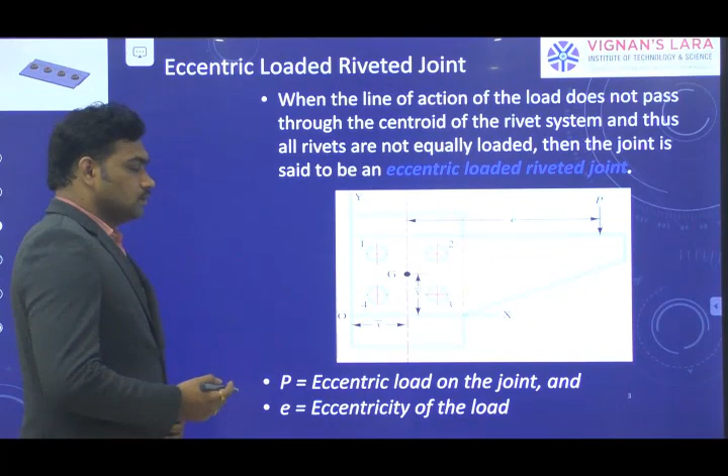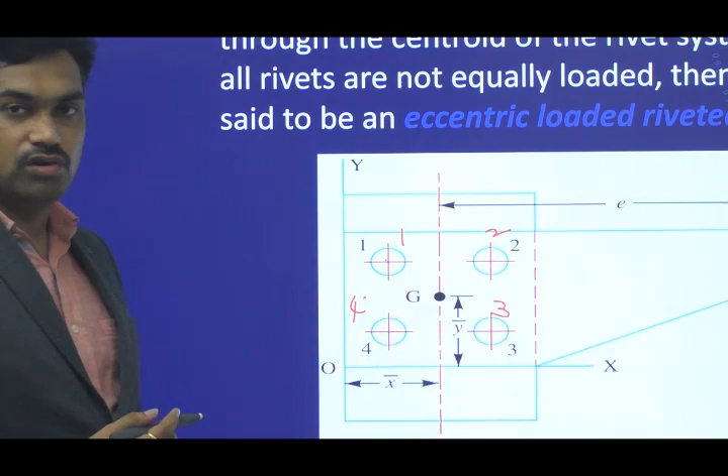So here it is an eccentrically loaded riveted joint. You can observe this is rivet 1, rivet 2, as well as 3 and 4. Here the load is acting on the joint, not directly with respect to the bolt rivets, but from the center of gravity of all the rivets. You can have the center of gravity at the center of the rivets, because of the symmetrical arrangement of the rivets. From the center of gravity to the load application point, that is load P, there is an offset distance given, that is e.

Due to this eccentric distance, the rivets may be subjected to twisting moment as well as shear of rivets. So how are these riveted joints going to be designed, in order to withstand the load P with the application of the eccentric load or distance with respect to the center of gravity?

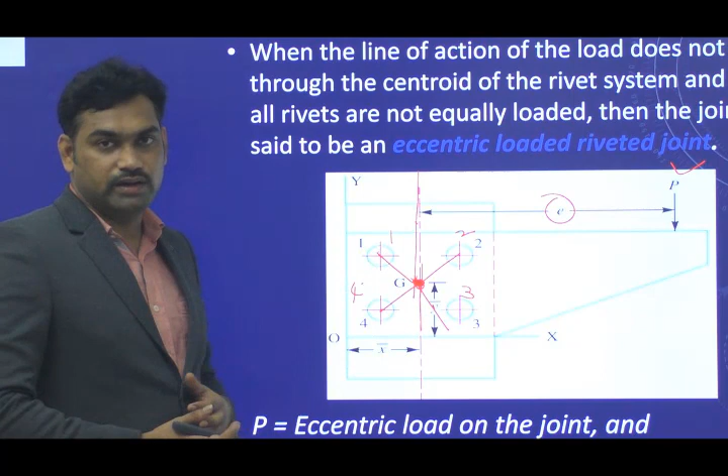The necessary size required to withstand the joint is found out in the design. So when the line of action of the load does not pass through the center of the rivets and the rivets are not equally loaded, then the joint is said to be an eccentrically loaded riveted joint.

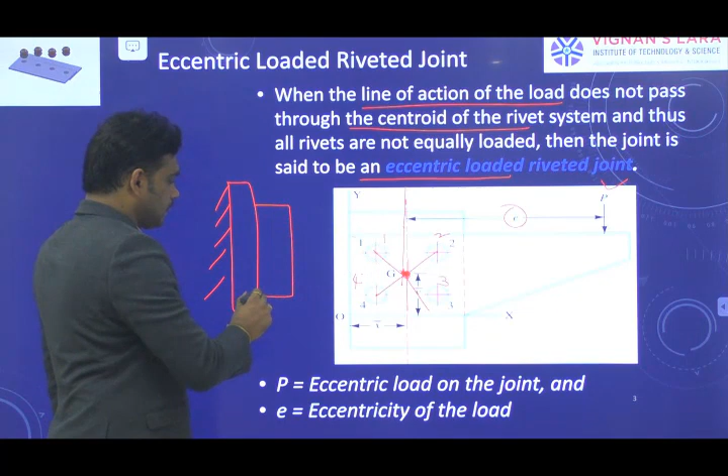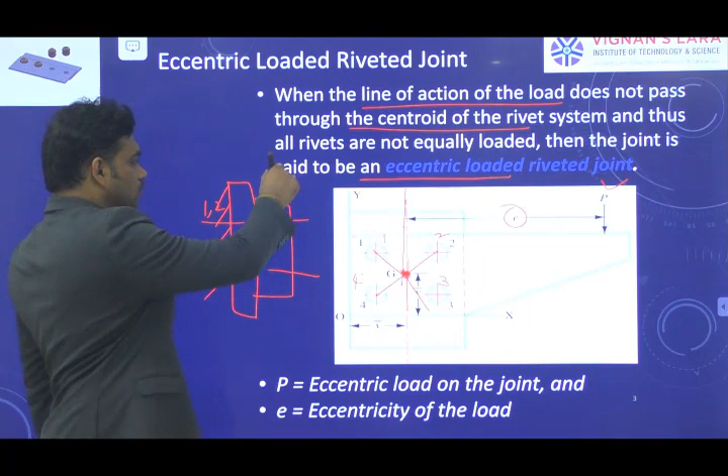So here I can observe, this is the fixed plate, and here this is the plate that is joined upon the rivets, which means rivet 1 and 2 will lie at the center, and rivet 3 and 4 will also lie at the center. By the application of the load here, the load is acting downward, in this direction, upon this plate.

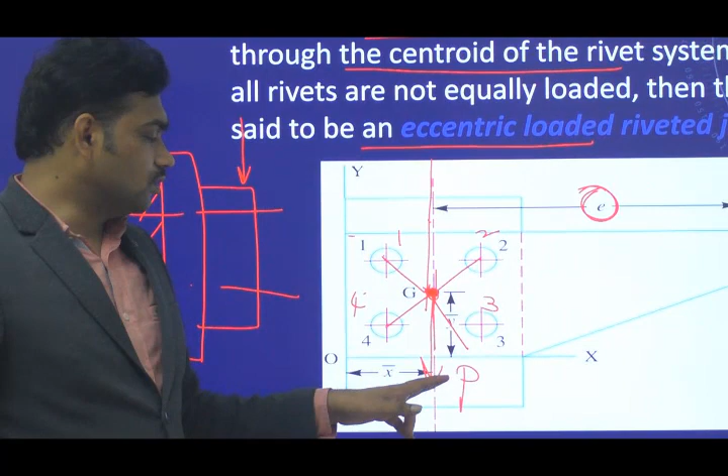Initially, we don't consider this eccentric load; we can consider the load to be acting at the center of gravity G, that is the center of gravity of all the rivets. The load will be acting through it. Whatever the magnitude of load acting at the end, the same magnitude is assumed to be acting or passing through the center of gravity.

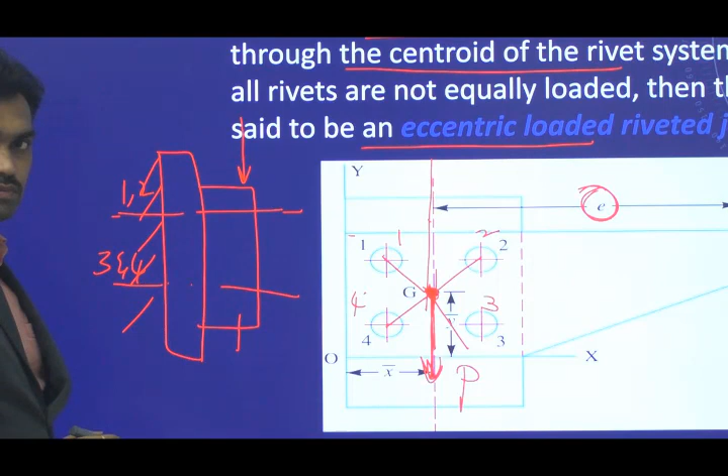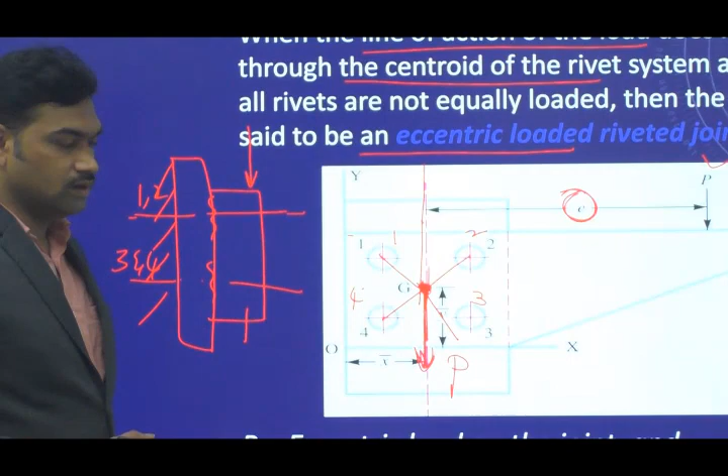Due to this load acting, the load is acting in this direction, perpendicular to the axis of rivet, which causes the shearing of rivets at this juncture of the fixed plate and the bracket. Due to this shearing, the shearing load will act.

Whatever total magnitude is acting at the center of gravity will be equally shared to all the number of rivets, so that the direct shear force, or direct shear resisting force, may act at all the number of rivets. That is what we call the primary shear force.

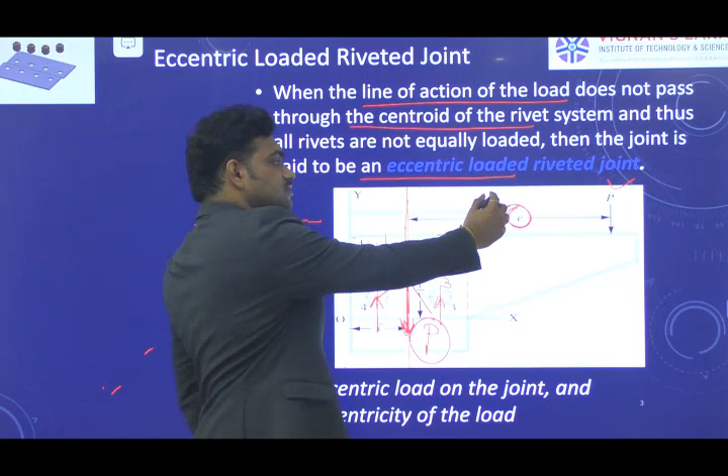Along with the primary shear force, now consider the second case. With an eccentric distance with respect to the center of gravity, due to load into its eccentric distance about the center of gravity, this will cause a turning moment. Due to this turning moment of load, that will induce or act as secondary shear forces.

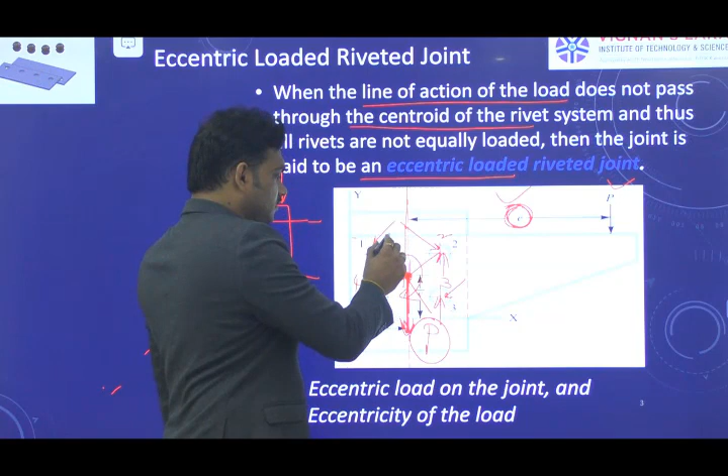So here we have two types of forces. One is when the imaginary load is acting through the center of gravity, which is subjected to direct shear, so that the total load can be equally shared to all the number of rivets — that is the primary shear force. Secondly, consider the eccentric distance E, which induces the twisting moment about the center of gravity, given by P into E, and that imposes the secondary shear forces, so that each rivet is also subjected to twisting.

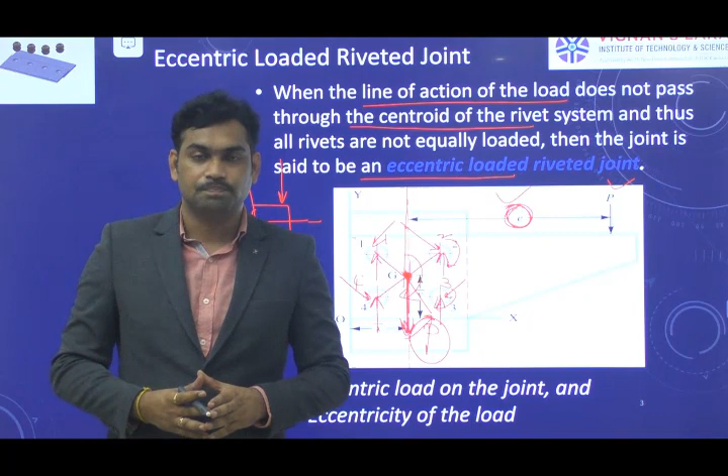So due to this secondary shear force, the secondary shear force is acting on the rivets here. So we need to see how the primary shear forces are found out, and how the secondary shear forces are found out, and finally how the resultant shear forces are calculated, so that it can be equated to the shear strength of all the rivets to find the diameter of the rivets required to withstand the eccentric load acting on the joint.

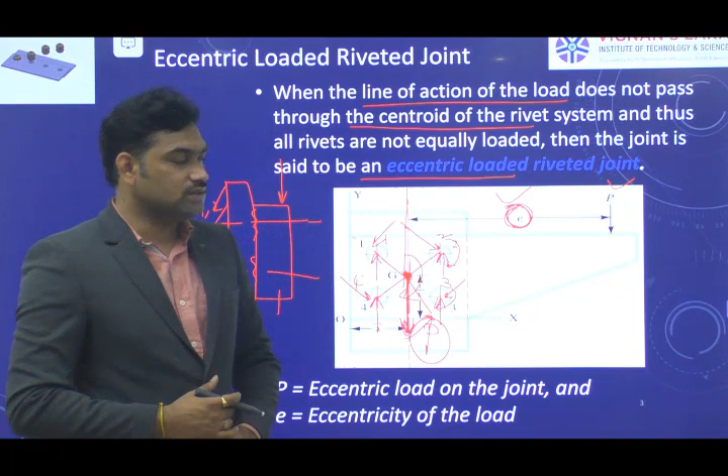Clear? So firstly we go with the primary shear forces. Before that, how to calculate the center of gravity, which you already know from earlier courses. The center of gravity is given by x dash and y dash with respect to all the rivets. There is A1, A2, A3 and so on. If you have the number of rivets, the cross section areas of rivets, and distances from the origin x1, x2, x3, x4 likewise by area.

Here we assume all the rivets are identical, so the cross section areas are the same. So I take n into A, so the total cross section area gets cancelled. So x dash is calculated by x1 plus x2 plus x3 and so on, divided by number of rivets denoted by n. Similarly y dash is calculated as y1 plus y2 plus y3 and so on, divided by n. By means of x dash and y dash you get the center of gravity of the group of rivets. Not a single rivet - for each rivet the center of gravity lies at its center, but for a group of rivets we need to find their proper center of gravity by knowing this x bar and y bar. That is the basic thing.

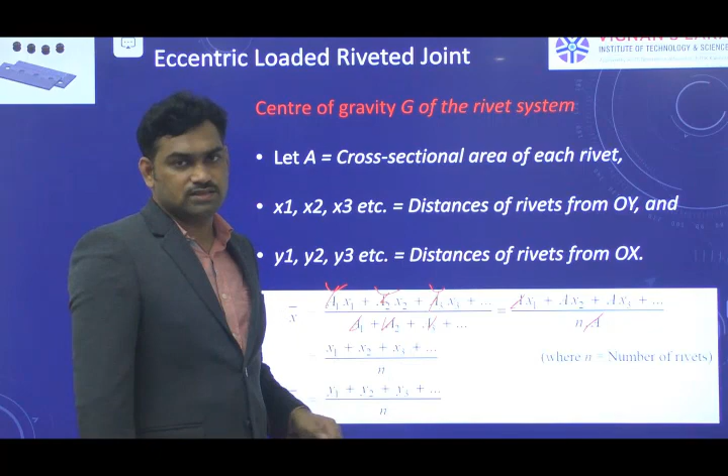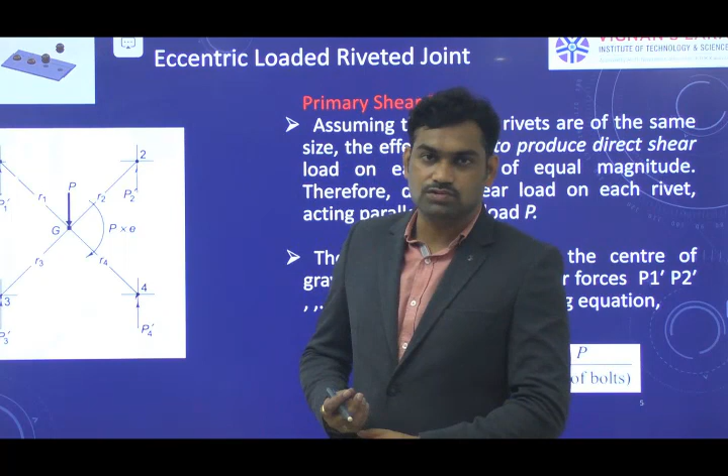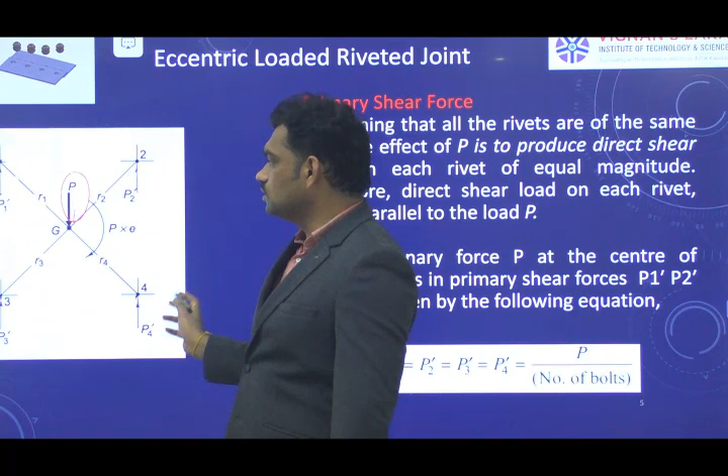After that you can find the primary shear force. Here the primary shear force occurs when the load is acting - an imaginary force equal to the magnitude of the load P acts at the center of gravity. You can observe in the diagram clearly, the load is acting downwards, so there are always resisting forces that act at each rivet. This total load can be equally shared by all the number of rivets - 1, 2, 3 and 4. All 4 rivets equally share it.

So the primary shear force acting at each rivet - the primary forces can be denoted by P dash, or P1 dash, P2 dash and P3 dash and so on - is given by total load, denoted by P, by number of rivets in the joint. That can always act upwards - the load acts downwards and the resisting forces act upwards, opposite to the load acting.

In the first case, assume the load acts along the center of gravity, so the resisting force acts upwards at all the rivets, and the total load is equally shared by all the rivets, given by total load divided by number of rivets. Here we assume the rivets are the same size. The effect of load P is to produce the shear stress, the direct shear load on each rivet, of equal magnitude. So the total direct shear load is equally shared by all the rivets.

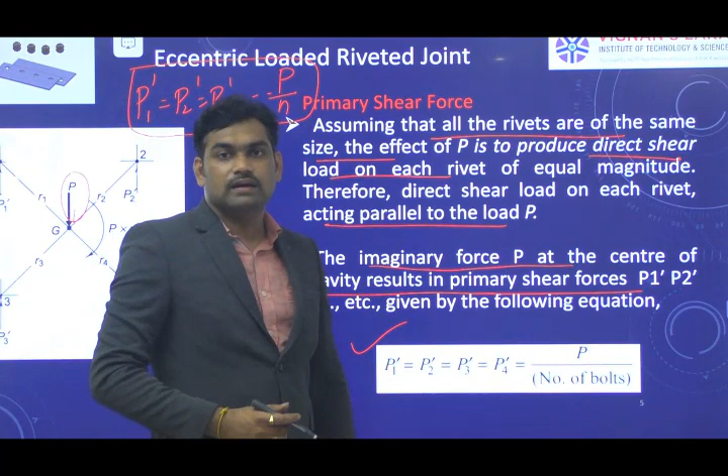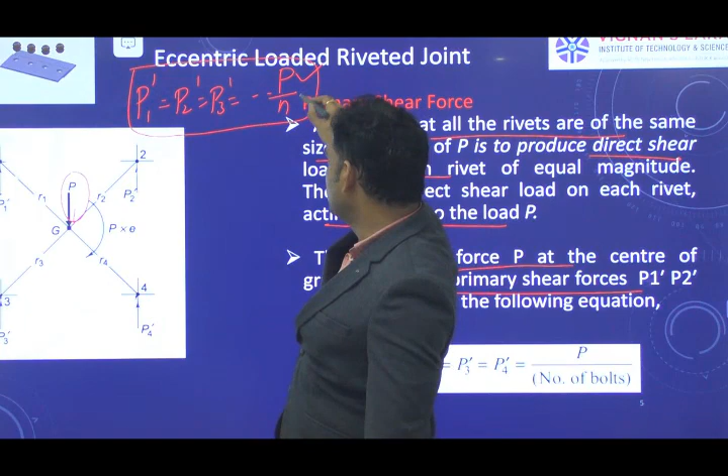The imaginary load P at the center of gravity results in primary shear forces P1 dash, P2 dash, P3 dash and P4 dash, given by the equation: P1 dash equals P2 dash equals P3 dash equals P4 dash equals total load divided by number of rivets. That is the primary shear force which acts upwards, opposite to the direction of the load acting at the center of gravity. Clear? So that is total load by number of rivets in a joint.

And next, the secondary shear force. You can observe that a moment is created due to the eccentric distance E, so the moment is given by P into E, about the center. The secondary shear forces are represented by P1 double dash, P2 double dash and P3 double dash, and act perpendicular to the radial distances from the center of gravity to the center of each rivet.

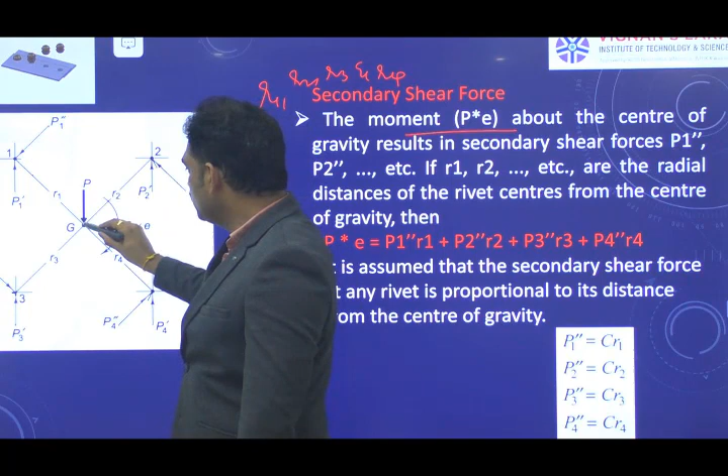The radial distances are denoted by R1, R2, R3 and R4 from the center of gravity to the rivet. So here you can write the center of gravity. This is the radial distance R1 for the center of rivet 1, R2 is the center of gravity to rivet 2, and R3 is the center of gravity to rivet 3. From the center of gravity to the center of rivet 4, you can denote it with R4.

The total moment acting in the joint, given by P into E, will be equal to the sum of all moments of all the rivets. So the moment at rivet 1 can be written as the secondary shear force acting at rivet 1 into their radial distance, that is P1 double dash into R1.

So that is about rivet 1. Similarly at rivet 2, P2 double dash into R2 gives the moment at rivet 2, and P3 double dash into R3, so moment at rivet 3, and P4 double dash into R4 gives the moment at rivet 4.

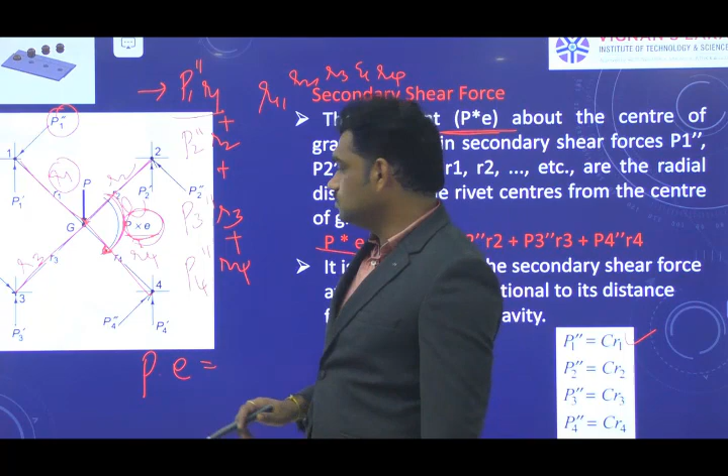So the total moment in the joint, denoted by P into E, can be equated to the sum of all moments of rivets, that is P1 double dash into R1, P2 double dash into R2, P3 double dash into R3, P4 double dash into R4. So the total moment is equal to the sum of all moments.

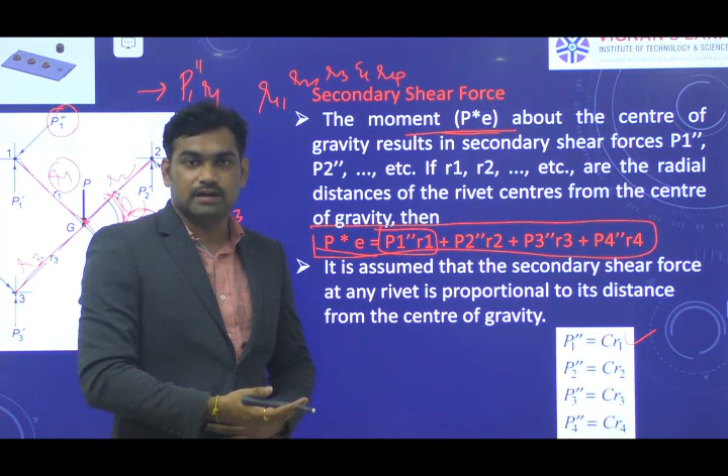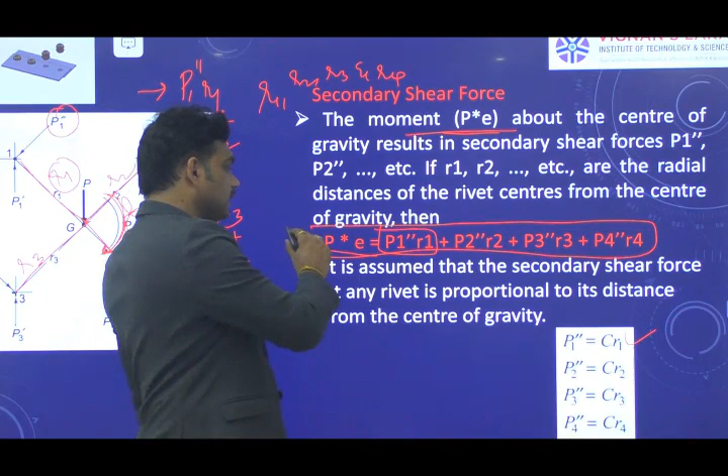Where P1 double dash, P2 double dash, P3 double dash, and P4 double dash are the secondary shear forces acting due to the total moment about the center of gravity, and R1, R2, R3, R4 are the radial distances from the center of gravity to the center of the rivets.

So the total moment P into E can be written as the sum of the moments at individual rivets: P1 double dash into R1, P2 double dash into R2, P3 double dash into R3, plus P4 double dash into R4. And there is one more assumption: these secondary shear forces acting at each rivet are directly proportional to the radial distances from the center of gravity to the center of rivets.

Which means P1 double dash is directly proportional to R1. If the radial distance is greater, the secondary shear force acting at that particular rivet is going to be greater. Similarly, P2 double dash is directly proportional to R2, P3 double dash proportional to R3, P4 double dash proportional to R4. So all the secondary shear forces are proportional to their radial distances.

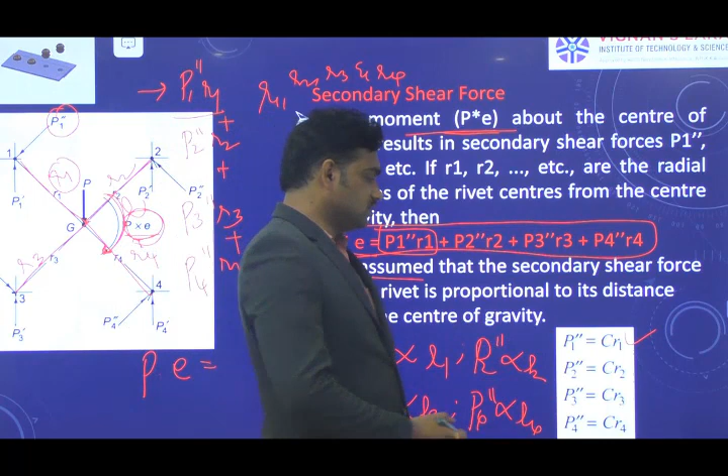To avoid this proportionality constant, I can place a constant C here. So P1 double dash can be written as C into R1, P2 double dash can be written as C into R2, P3 double dash equal to C into R3, P4 double dash equal to C into R4. This will be taken as equation 1, and this as equation 2.

From equations 1 and 2, P1 double dash can be written as C into R1, P2 double dash equal to C into R2, P3 double dash equal to C into R3, and likewise we get C into R4. So you can take a common factor of C here.

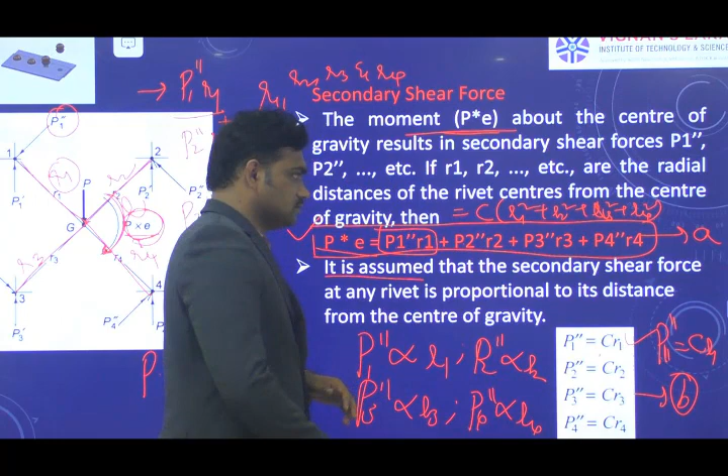So PE can be given as C into R1 square plus R2 square plus R3 square plus R4 square. From that you will get the value of C, calculated as C equal to PE divided by R1 square plus R2 square plus R3 square plus R4 square.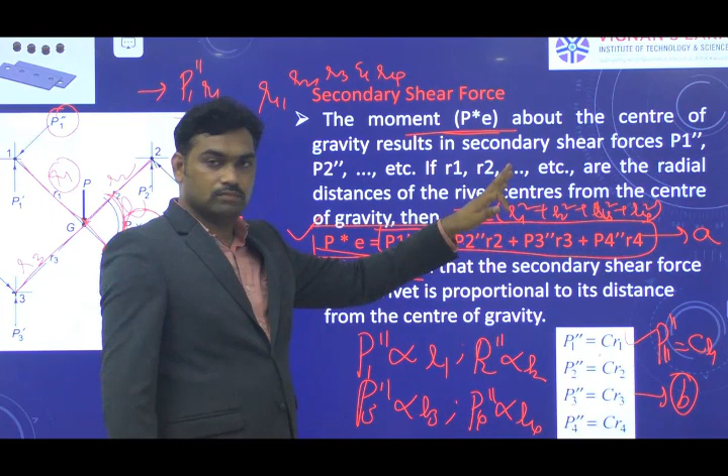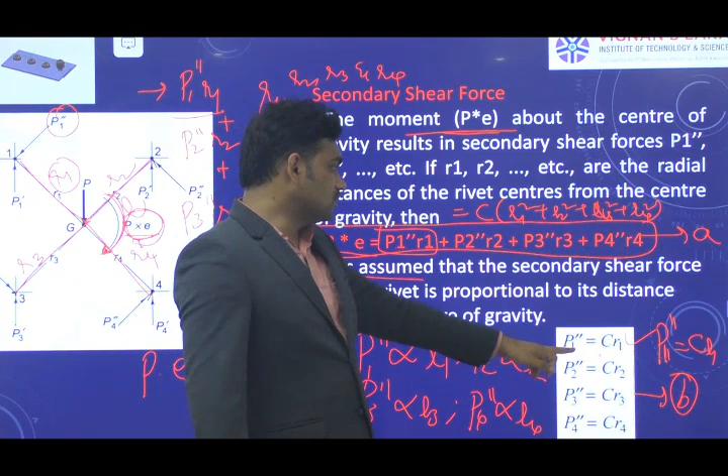Using that you can find the secondary shear forces acting at each rivet. So P1 double dash equal to C into R1, and you can substitute the value of C, which is PE by R1 square plus R2 square plus R3 square plus R4 square. So here we can substitute the value of C and get the secondary shear forces.

So secondary shear force can be given by P into E into R1 by R1 square plus R2 square, R3 square plus R4 square. Similarly P2 double dash, P3 double dash and P4 double dash, you can find out the secondary shear forces.

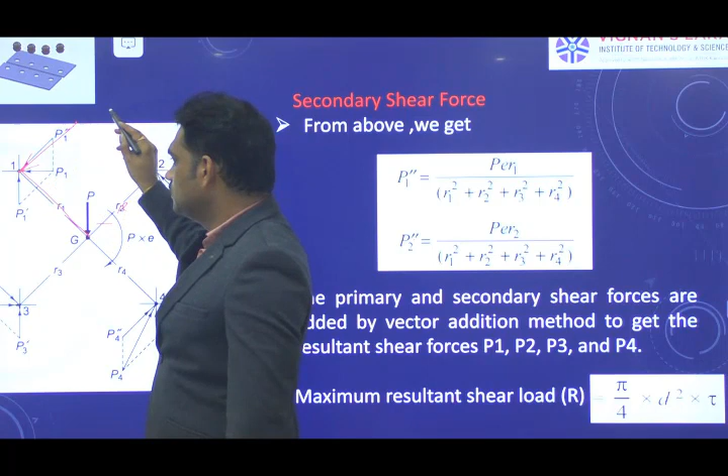But these secondary shear forces will always act perpendicular to the radial distances. You can observe, P1 double dash is acting, this is the radial distance, and this secondary shear force acts opposite to the moment. The moment is clockwise, so we have the anti-clockwise direction. We need to act the secondary shear forces perpendicular to the radial distance, that is P1 double dash and P2 double dash, this is the radial distance, and P2 double dash is perpendicular to that.

This is P2 double dash, and this is the radial distance of rivet 3, R3, and P3 double dash is perpendicular to that. Similarly, this is R4, so P4 double dash is perpendicular to that. So you can observe, all the secondary shear forces act in the anti-clockwise direction, because the moment is acting clockwise, we need to take opposite to that, anti-clockwise.

So you can observe, all the primary shear forces act upwards, and the secondary shear forces act perpendicular to the radial distances. Please remember that: primary shear forces act upwards, and secondary shear forces act perpendicular to their radial distances.

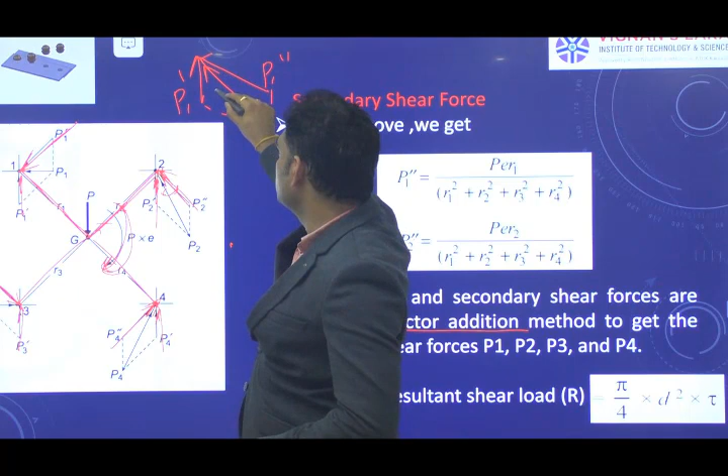After calculating the primary and secondary shear forces, we need to find the resultant shear force by means of vector addition. If we find the angle between the primary shear force and secondary shear force, primary acting upwards and secondary with some inclination, this is P1 dash and this is P1 double dash, we can find the resultant shear force, that is P1, the resultant shear force acting at rivet 1.

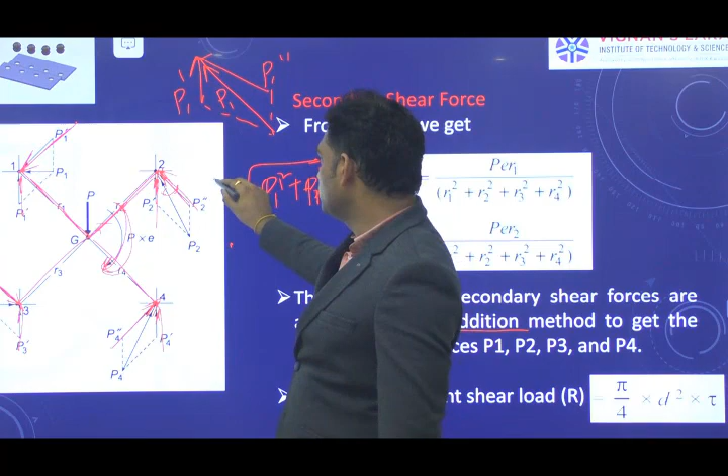Similarly, you can find all the resultant shear forces by means of root of P1 dash square plus P1 double dash square plus 2 P1 dash P1 double dash into cos theta, giving the resultant at rivet 1. Similarly, you can find all the resultants.

The maximum resultant value, that is the maximum resultant shear load, can be equated to the shear strength of the rivet, that is pi by 4 d square into tau, the shear strength of each rivet. Here I don't need to take n, because this resultant shear force is only for a single rivet - we are calculating separately the resultant forces at each rivet.

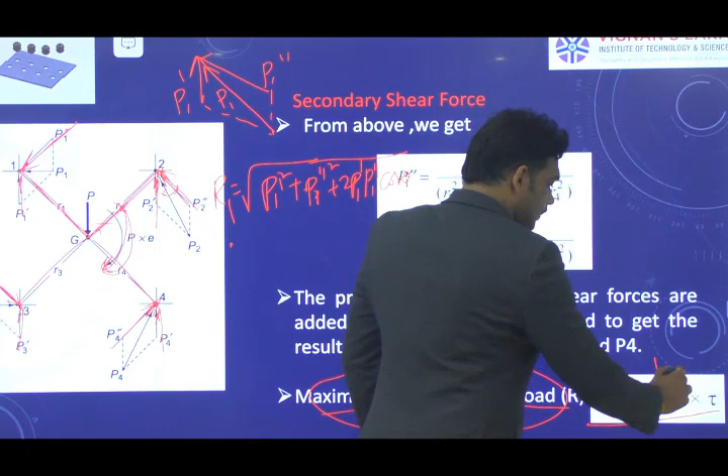So the maximum resultant shear force can be equated to their shear strength, that is the shear area pi by 4 d square into their permissible shear stress. From that you can find the diameter of the rivet. Due to eccentricity, the same design procedure can also be followed for eccentrically loaded bolted joints when the bolts are in shear condition. The same procedure can also be followed there.

Here the primary force is shear, because the load is acting perpendicular to the axis of the rivets. The load acts downwards, and the resisting forces act upwards at all the rivets, and their magnitude is such that the total load can be equally shared to all the number of rivets.

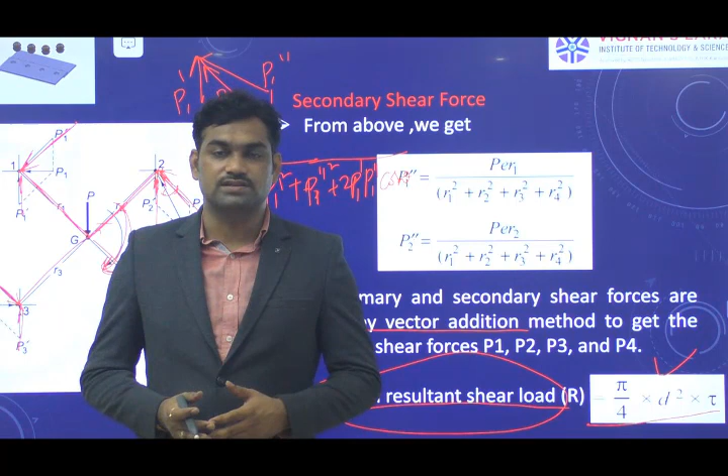The secondary shear forces due to the total moment - the total moment can be taken as equal to the sum of moments at each rivet, given by their secondary shear forces into their radial distances. The radial distance is from the center of gravity to the center of the rivets, and the radial distances act anti-clockwise, because the moment acts clockwise, and their direction is perpendicular to their radial distances.

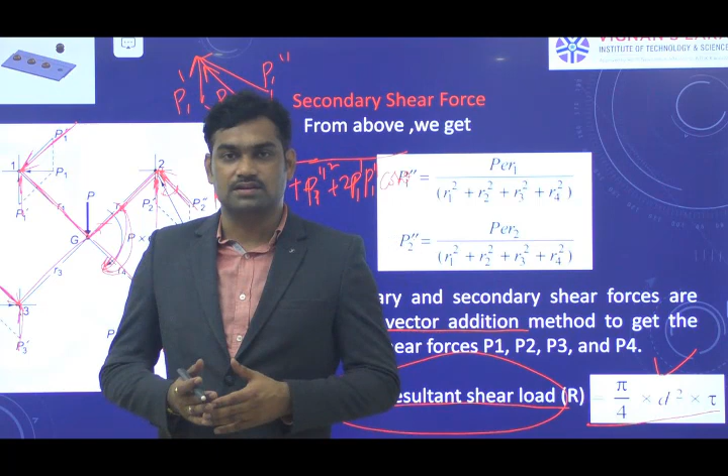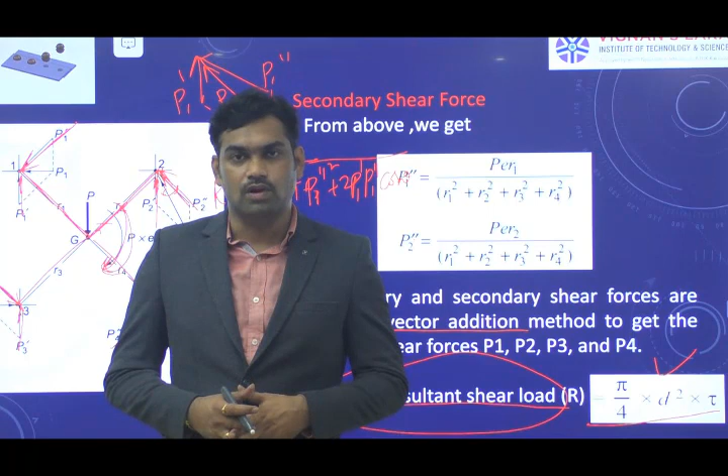After getting primary and secondary shear forces at each rivet, we can find the resultant shear force at each rivet by means of vector addition, and the maximum resultant shear force can be equated to the shear strength of rivets, that is pi by 4 d square shear area into the permissible shear stress tau. We can find the required diameter of the rivet used in that particular joint in order to resist the externally applied load.

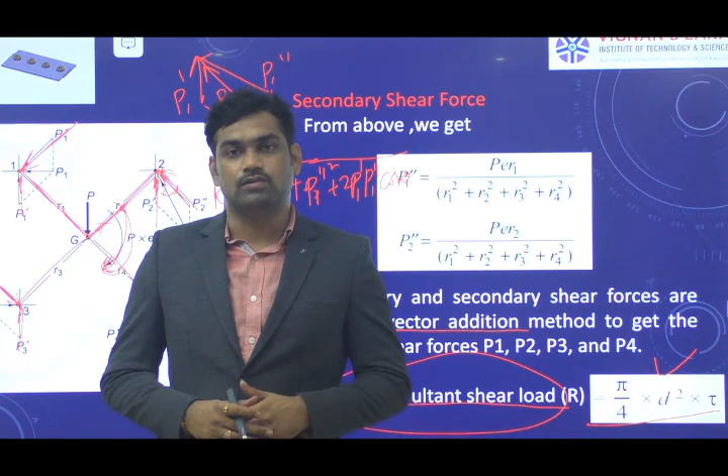We can go with some example problems in the very next class. After that we can move on with the welded joints. Thank you.